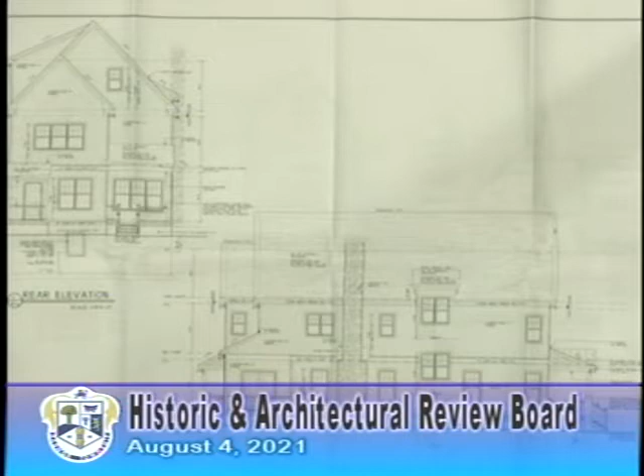Okay, are you going to put plantings or something to disguise that? Sure. Missing 3 feet? I don't have any objection. I'm glad that you did take our comment and put the chimney in. I think it makes a nicer looking house, and it'll be easier for you to sell. Thank you, we agree.

Any further comments from the board? Questions? Before I open it up to public comment? I suggest we open up for public comment. Is there any public comment?

Please come to the podium, sir. Can you hear me okay? Okay, members of the board, I have a printed form of my presentation. If I can, would it be okay if I shared that with you? Yes, okay.

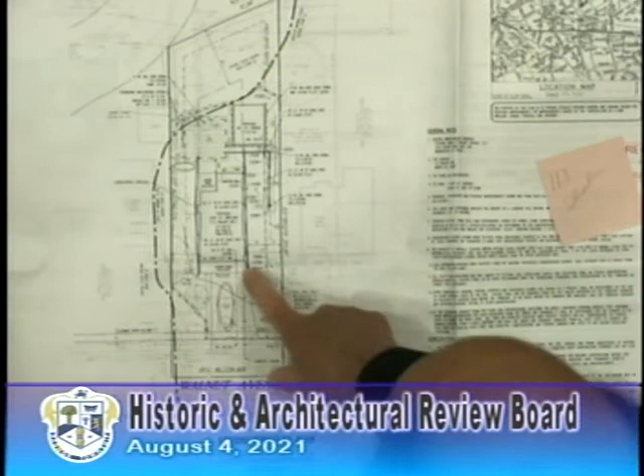But it's not. You're still sticking, it still looks like about 5 feet or so there. And I put it to you to look at this house, where the setback is 55 feet. But that's not, along with all the other houses on the block.

So I don't think you should cherry pick. You shouldn't cherry pick the twin house for its setback and ignore the setbacks of all the others. But you chose to cherry pick one in a block of Walnut versus all.

One person at a time, please, and then we could have further comment. Good evening, I'm going to ask if I can speak. My name's Gia Raffaelli.

I'm general counsel for Fox Lane Homes. I reviewed this project with them ahead of time. I tried to review your ordinance and your directions ahead of this meeting.

I just want to comment that I think we're getting off what I believe is the appropriate discussion here. I believe your ordinance asks you to provide input and direction in your certificate of appropriateness for a range of homes of varying setbacks, consistent with the North Wayne area. So you can't pick one house and say you have to be this far back. You're looking at a range of the area, and I think that's appropriate.

Just like you can't tell us that we had to be 10 feet from the street and then violate your own zoning ordinance, I don't think it's appropriate to say one house should be 55 feet back because a lot of the other ones are 55 feet back. I think that what we've demonstrated is that we do meet the general theme of your required ordinances and the design features that you're looking at. To get so specific to say we have to be 55 feet back, I think goes beyond what we should be talking about this evening.

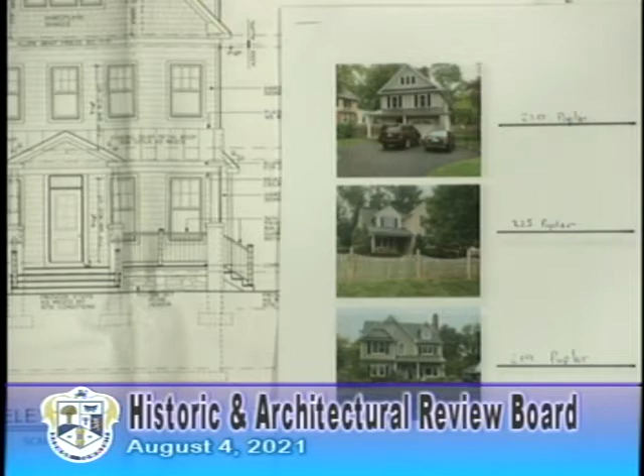I want to call attention to the fact that a contributing property is something that is contributing, and a non-contributing property is something that was built after a contributing property was demolished before this committee existed. Okay, so my question to you is, is that a historic house?

I can't see that far because there's too many things in front of me. No, it's a newer construction home. Okay, so you can't really use that as an example. Correct, so please don't use that as an example. I misunderstood the contributing versus non-contributing. I'm looking at North Wayne, and I'm finding examples of homes that are... You can't use an example of a non-contributing property to justify your non-contributing property. I understand that now.

Any further public comment?

Please approach, ma'am. I live on Walnut Avenue, and we did not know that the last... well, it doesn't matter, I'm going to shout anyway. This microphone? We did not know that this building was coming the last time, or we would have come to present then. When they talk about canvassing, we all live on Walnut Avenue, and no one came up and down Walnut Avenue

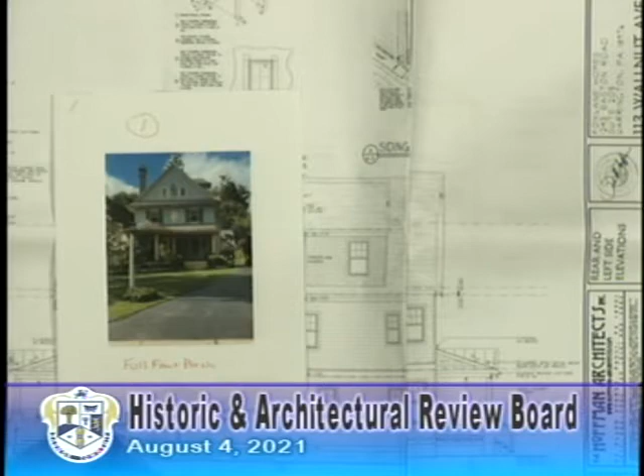Can I just throw out one idea quickly? So the inspiration for our design, which I should know the address but I don't, was this house. You might know the address? Is that the same non-contributing property that the gentleman submitted before? No, this has to be one of the original houses, I believe. I can't say for sure, I don't know.

From a size standpoint, if you look at that house compared to what we have, it does have a little bit of what I'd call an eyebrow going all the way across the front. Slide over, better. So what we could probably do to match this up, we could round the window, half round the window on the top, to mimic what's right here. And then we could take this roof, which I think the gentleman had the concern about being too flat, and bring it out to give it a little bit more depth, a little bit more contour, which I think would give the potential look you want.

Obviously, we have no problem doing a flat roof there, taking the little turn gable off. We were doing the turn gable because there's another house on Walnut, I think the opposite side of the street, that has a little turn gable with some gingerbread and stuff. That's where we were trying to match that look.

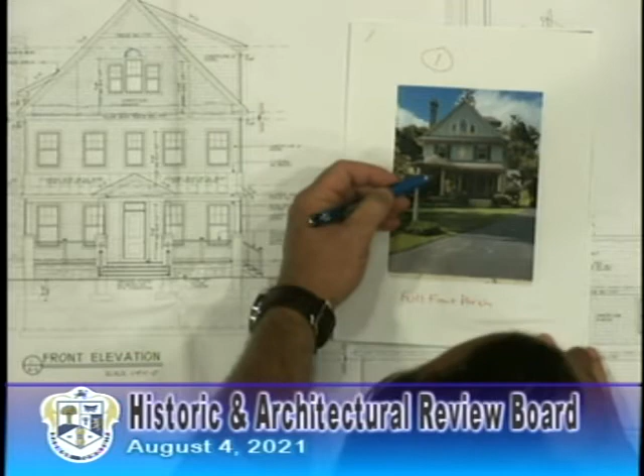Not a 5-bay design, right. But I don't think every house has to be exactly the same. Houses built 100 years ago were built the way they were because it was 100 years ago. Modern houses, people want more light. So just because it was built 100 years ago doesn't mean there isn't a better way to do it.

Well, there are hundreds of people living in North Wayne in old houses that wanted to have that. Which I was one of them. I currently live in one, I'm totally in agreement. At the same point, there's a lot of people that like light in their house. If you build a new house, you want it to work. But it's in a historic district. Completely agree. And once you're in the district, the whole point of being in that district is that you fit in.

Do you think someone who's going to buy in a historic district wants to have the only house that doesn't fit in? And that's right, I think it would totally fit in. The location is great, but you have this historic district, and that's exactly why it was formed. Other than the windows across the front, we could literally mimic this other house in the historic district and make it look almost identical.

Historic district, are you talking about the district? Because every time we talk about the district, you guys talk about contributing and non-contributing properties. We're talking about the district, which is North Wayne, and there are homes from varying time periods. What I'm actually talking about is Walnut Avenue and the relationship of this house to the other houses on Walnut Avenue. Everyone realizes the district as a whole has houses from varying time periods, from say 1870 to 1910. But we're talking about the spatial coherence of Walnut Avenue and the Wendell and Smith homes around it.

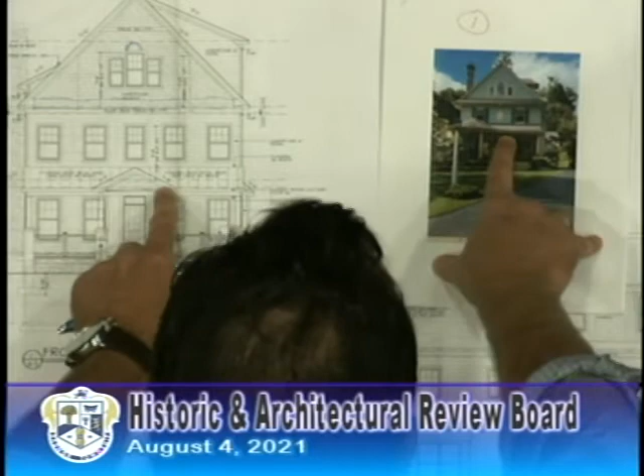We'll get the exact address for you. But we would match that. We would obviously do shingle on the metal roof. We'd take the little turn gable out to pretty much match it, and then add the half round window up top, if that would help it fit in more with the historical feel of the neighborhood.

Can I comment? Just mention that the fact that the chimney is cantilevered - the chimney came all the way down and the door has no setback, that's why it has to be cantilevered out over the chimney. That came up two months ago. We proposed actually putting the chimney in the middle of the house, similar to what it is on the twin, to get that look. I believe one of the board members did not like that look, so that's why we did it this route. But it came up two months ago.

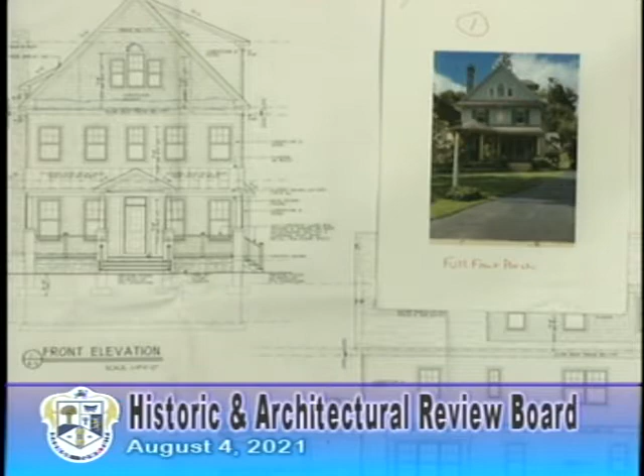Regarding the chimney thing, and we live next door, I've been up front with them. I'm the person that invited him over to my porch to discuss our concerns about the property. He had said that HARB had suggested they put it on the ground, but there's a lot of precedent for it being on the roof. Ours is, I counted at least 6 on our street. They're not all on the 100 block.

To build a fake chimney in the middle of the house and a cantilevered chimney that went part way up that would be functional, right? Yeah, right, correct. So just to clarify, that middle of the house chimney was the non-functional cosmetic one? It would just be for looks. Yes.

Comment, please? I'm John Velutini, 106 Walnut Avenue, and I understand Michael's concern about the flat facade.

So I don't know what's going to come out of that between you and HARB and all that, but when I look at the flat facade, if I look at the house, if I look at a bucket of new construction, relative to new construction, it looks like a nice house. But relative to the neighborhood, the flat facade, and what's the depth of the porch, do you know off the top of your head?

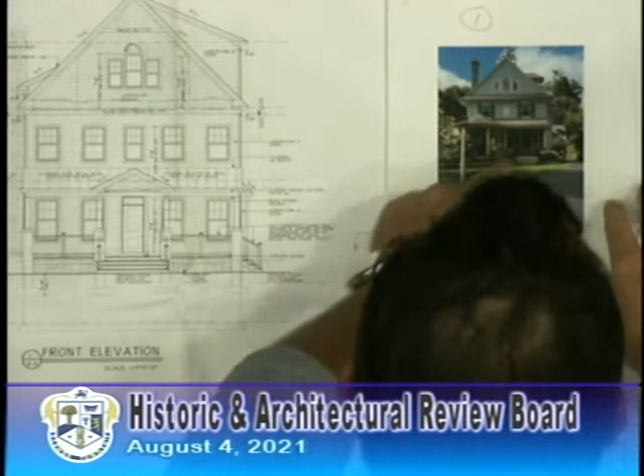Yeah, no, we could definitely do a color rendering. Having said that, this is a color rendering, and we'll mirror the windows, we'll mirror the roof line here, and then we'll just do a flat roof straight across here, and we'll get rid of the turn gable. So we'll pretty much give you exactly, other than the little bit of the half round here. If you could do—I can't see the picture that much, but is the front door centered or on the left? This one, on the right. Oh, yeah.

I'd like to make one comment on a 3D presentation. Of all the time I've been on the board, over 5 years, we only had one presentation that was in 3D, but boy, did that say a lot. It was wonderful to be able to see those proportions in multi-dimensional space. I believe it was Gardner Fox who did that, the architect, and it really made a difference in the presentation. So maybe that's something you would like to consider, because the visuals really explain a lot. And it seems like the questions from the neighbors, they want those dimensions, and I think it would really help if you could do that. Would you be willing to do that?

Yes, we'd be willing to do a rendering so you can see it. But just to confirm, if we do the things we talked about to more mirror the house on Poplar, we just don't want to come back next month and then the neighbors have something else to bring up—we just need guidance, like, that works, and we'd be okay with that, based on obviously seeing the 3D rendering. But we just don't want to go another month and then something else comes up, hey, what about this? So we just want to kind of—

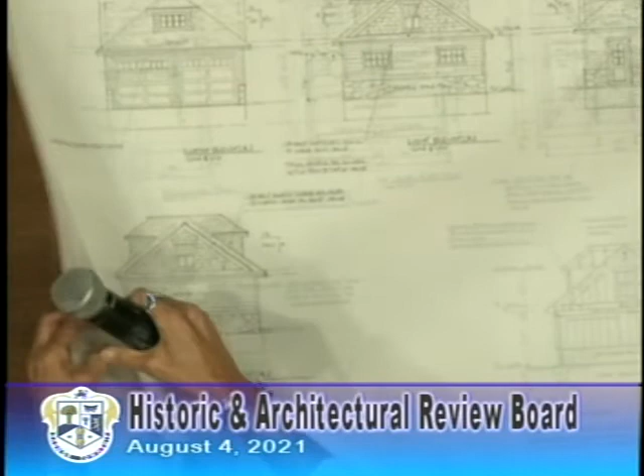How do you do that? How do we get the overhead to work? Oh, there it is. Not very clear.

Okay, so part of this garage is existing. It's got a stone foundation, and we're not exceeding that. The current structure is absolutely breaking down—it's not safe to even park a car in there. It has a very low pitch hip roof, which obviously was not built with the original house; it was added on later.

So we are duplicating the garage somewhat, but I'm also trying to add in some elements of design from the house. The house has hipped roofs—the whole house is all hip roofs, hip dormers, hipped everything.

The problem was these people need storage. Their existing basement is all stone and very damp, so they can't store certain things down there, and they have limited storage in the attic because of the extreme angle.

So I designed a roof that combines elements of the existing garage and elements of the house—I've got dormers on each side. The facade facing the street has the two garage doors, carriage house doors, which the existing garage has. I kept a hipped roof design pretty much matching the house, with a hipped dormer for more space inside, and I have dormers on both the front and the rear.

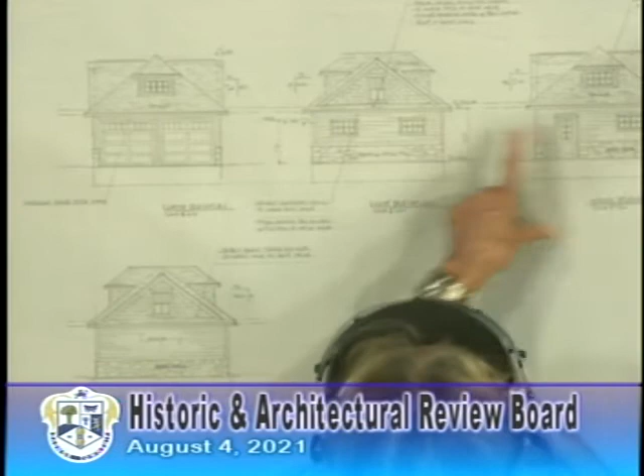The windows we're duplicating the windows that are there now—this window in the front, and the side windows duplicate the house. Those are the windows on the house currently. They will be simulated divided light to match the house.

The trim will match the house. The siding will be a combination of clapboard with a few shingle siding up top. The roofing will match the shingles on the existing house. The stone we will just repoint and repair as necessary.

I have a question—what is the height of the existing garage? The height of the existing garage is a little over 8.5 feet, and we're proposing 9 feet so we can get an 8-foot door in there. Okay, thank you.

This is one of those Japanese-style houses? Yes. Were you planning to put that little flourish on the roof that the rest of the house has? We could, if you'd like, if it's not going to be economically onerous. I think it would make it look like it truly belongs to that house—that's such a striking architectural feature, more so than the coloring or siding materials.

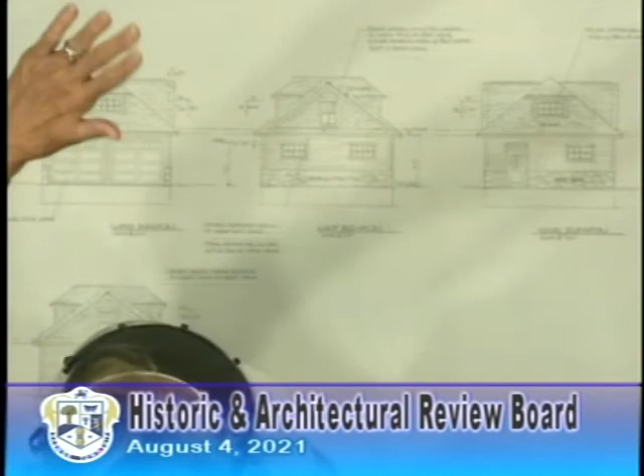Okay, so I think what I can do is a little scoop right up here at this peak. That would be perfect. So only the actual dormer—this one would have a scoop to it. We could do that. It just means cutting the angle in the rafters.

It's also good to see that the original foundation will be used. Yes, it will still be there. That's one of the things we strive to do—preserving materials and original footprints. Bob, could I speak to that, please?

Surely. A few questions. On your last page on ASP, it appears that the existing garage is over the property line. Is that the case?

No, I mean, just visually when looking at the drawing from Gardner Fox. Bring the other...

We brought our builder, he could speak to it. I'm Jane, I'm the property owner of 111. Can you hear me? Okay great. If you look, you can see the pins. The actual structure is within the pins, very close to the property line, and the overhang is on an easement in perpetuity. I brought a copy of the easement with me.

The reason I bring this up, and I believe I spoke with your builder about this, your plans say to verify the foundation, which is very common for structures of this type. It'll have a rubble foundation. The point I'd like to make is that if the foundation is deemed unsuitable to build on, which happens occasionally, we have to be very careful that you pin that foundation exactly where it is so it can be put back with a new foundation, because it is an existing nonconformity. So there's just a technical aspect to that, just wanted to make sure everyone's aware.

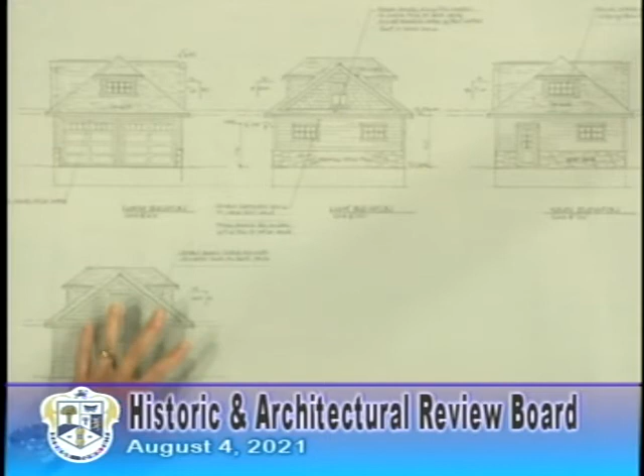Also, there is some vegetation around here, so this window will be facing you, that will be facing yours. So when you look at the garage, when the vegetation is finished, you're going to be seeing still a window up top. You won't see side windows, but it's more money to add windows. I was just duplicating the window configurations that are there now.

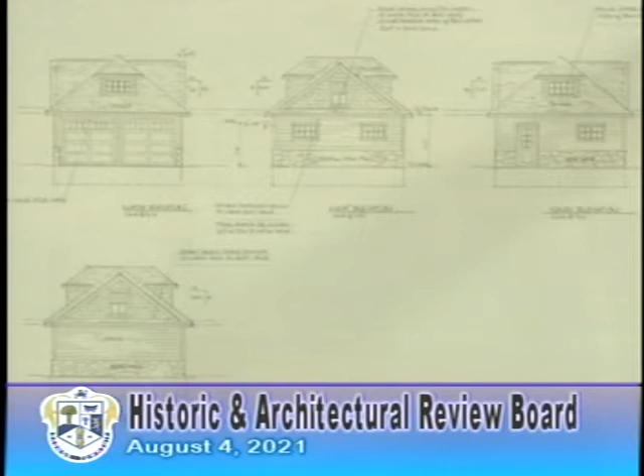I think your design's fine. Any further comments or questions from the board?

I have a motion. I'd like to make a motion that we offer a provisional certificate, that we recommend a provisional certificate of approval of appropriateness with the change to the roof line to mimic what is existing on this very striking and also very public Japanese house, because it's on a corner and every inch of this property can be seen from the street. So as we did with the addition that they put on, we really just need to be careful that it looks like it came with it, even if it didn't. Got it. Understood. So I make a motion for a provisional certificate of appropriateness with this change in design.

Okay, can we just submit the drawings to you for the change of design? It's minor, do I have to resubmit at another meeting? No, okay. So that's the language that's going to go to the commissioners. Got it, so they will look for that change in design. Okay.

Is there a second? We like the design as it is. Yeah.

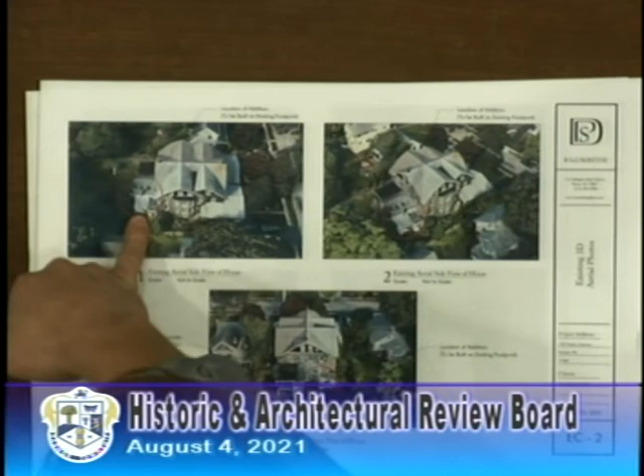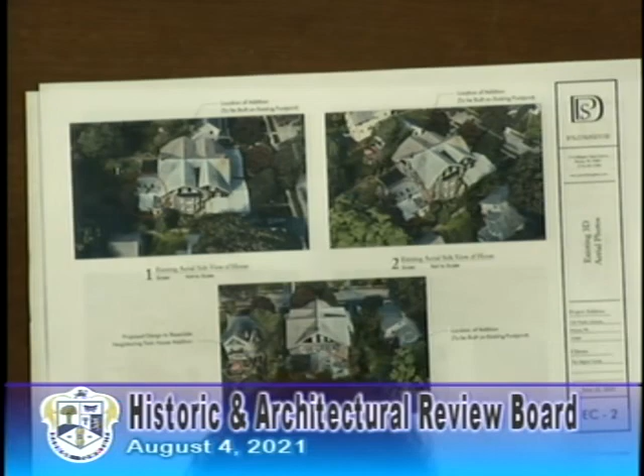And just to give you an aerial view so we can all see where we are. In this first image, Poplar runs down the right-hand side of the picture. We're in the very rear of the home here where the red circle and arrow are. Can you see that? It's a little dark up there. Similarly, from this angle, Poplar is up to the top right of the page, and a direct aerial rear view of the home shows Poplar at the top of this picture. So we're in the back here of the home, just to give everyone the site location.

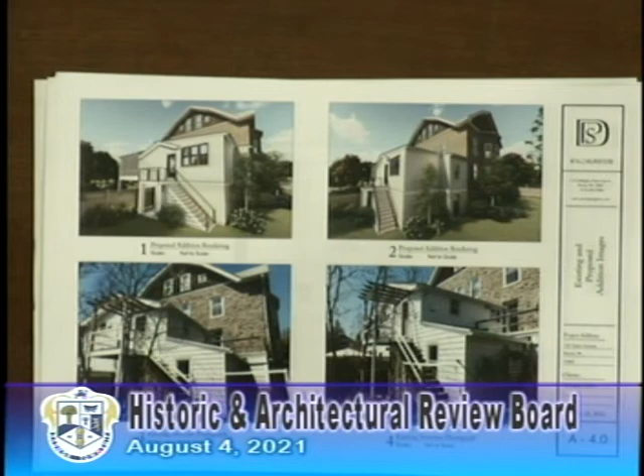So what we are proposing for the homeowners is working on the existing footprint to remove this patio or deck and extend the kitchen out, keep the existing stairwell, and really just capture this additional square footage to provide a larger modern kitchen for the family that lives in this home, but honor the footprint and keep the design from the exterior relatively simple. Let me pause for any questions or comments while I'm on these images. I can move into drawings, but based on your feedback tonight, I thought I would start with this.

Yeah, I was curious, when I saw the pictures of what exists there in the back, and this has come up before, I was always curious because sometimes those additions were used as places for toilets. There were a couple of examples in North Wayne, I believe, and I was always curious about that.

So I got a pattern book from 1861, Woodward's, a popular pattern book at the time. It was really interesting because in a lot of the patterns in that book, the toilets were on the first floor in the back of the house, and the bathrooms, where you had your bathtub and things like that, were on other floors. I know there was at least one example in North Wayne where that portion in the back of the house was at one time used as a toilet. That is interesting.

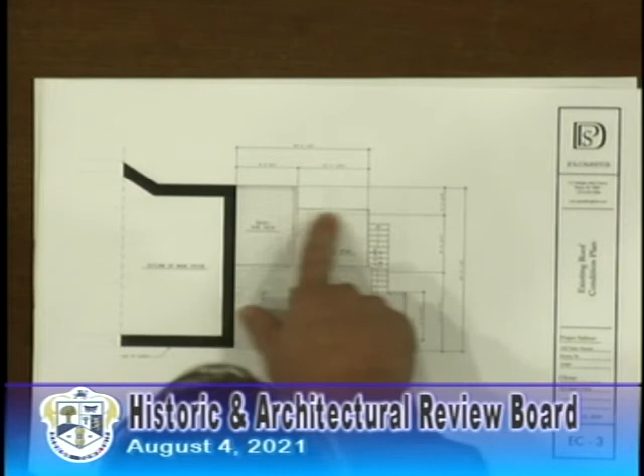Okay, now that we can see what this will look like, I'll take you through the plans. This is the existing roof plan of the home. Here's the existing kitchen roof, the existing side deck, and the existing basement roof. And here's the existing back deck and stairs. We'll be using this existing footprint to really just bring all of that into the interior.

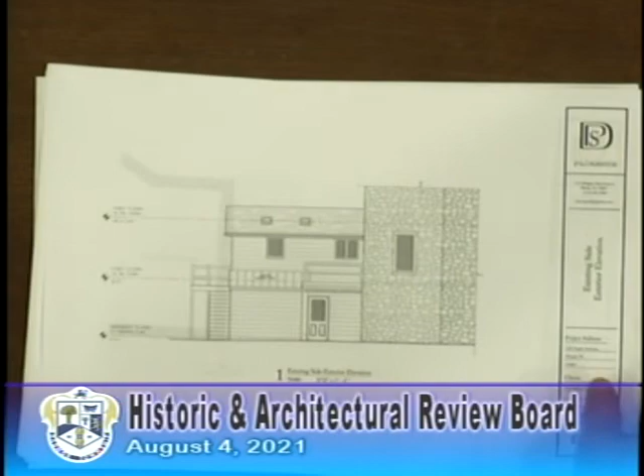And here is the proposed rear exterior elevation, doing our best to mimic the roof line on the other side of the twin, so that if anyone were to look at these two homes together, though they are twins, this will make them look more like twins than they do today.

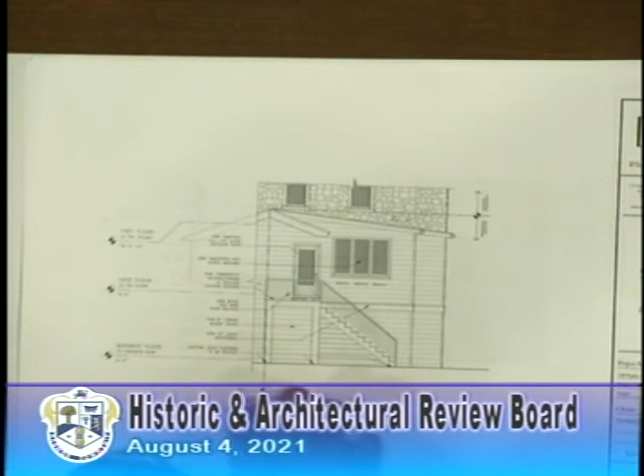I don't know if you want me to take you through all of the materials. Happy to do that. Here's the proposed side exterior elevations. Again, same stairs, same back deck on the existing footing. As you can see in the renderings, we will have plantings here to compensate for some of the siding, but everything else is matching the existing styles. The K-style gutter will match the decking treads, all of the windows, the siding—everything is really designed to be relatively discreet.

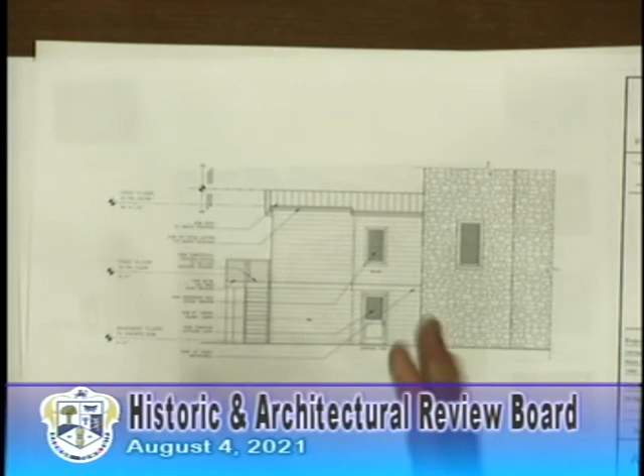The exciting piece of the project for the clients is on the inside of this home, so our mission was just to contain the space and match what we could to the existing. The proposed addition, in my opinion, does keep the main house prominent. Yes, that's what we look for. Also, I think it would be really a challenge for somebody to see this addition from the street. I agree.

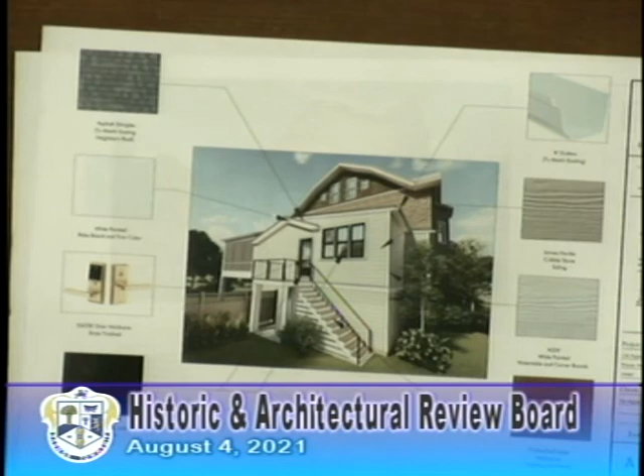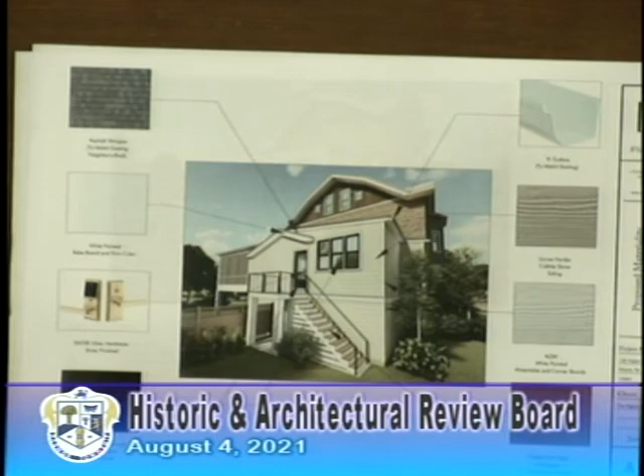So just to move back to the 3D rendering and show you, the materials are called out here. I won't read them all to you unless you'd like me to, but everything has been accounted for, to the point the board is making: the objective here is to not have any impact to the street view of this home. The front of this home is unbelievably cool, and we're not doing anything to it. This was actually the cover page, but I wanted to start with the street view just to emphasize that we're not impacting it at all. So that concludes my presentation.

Well done. Any further comments, questions from the board?

Okay, well, we have a motion. I so move that we offer a recommendation for a certificate of appropriateness with the understanding that this cannot be seen from the street. Thank you. Is there a second? Terry? Yes. Okay, we have a motion for certificate of appropriateness. The motion was seconded, and it was thirded. I also say yay. The board recommends a certificate of appropriateness. Thank you for presenting to us today. Thank you for your time. Thanks.

All right. Our last piece of new business this evening is HARB 2021-17, 424 Woodland Avenue.

Before we get into the presentation, I'd like to give some basic background on this property. According to Radnor Township records, they say it is a contributing property. It was built in 1885 to 1889. The architect was Price Brothers. The builder was Wendell and Smith.

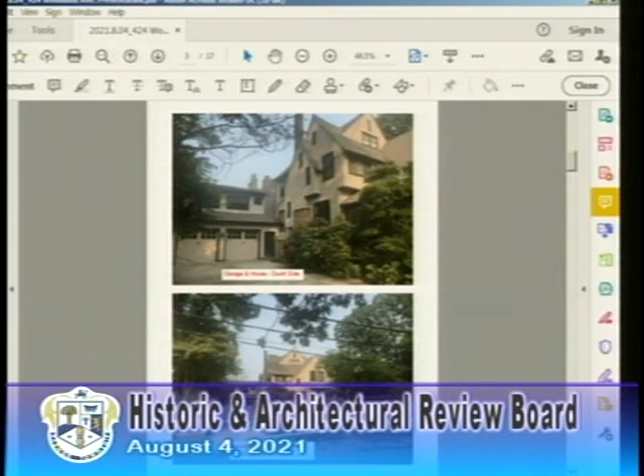You can see this is the house from the street. We are not touching anything on the rest of the house other than to restore it, and even the windows are in good shape. So we're painting, we're keeping the roof line, we're keeping all the stonework, and basically the additions will be done in the same manner, all the same materials, and we're going to match cedar siding. It's painted cedar siding and cedar shake siding and so forth.

This is the view you see from the street. That piece, as you can see, is the addition that was done in the 90s. The kitchen was enlarged, and a very large family room was built on the back, and the garage was actually built in the 90s. And you can see the deck that sticks out from the French doors.

So what we're just, there's the side of the garage, it's along the property line, there's a very long, mature tree line along that side. And just for context, you probably know about this neighborhood, they were all built sort of slightly quirky versions of that era of house. All of them had additions done to them. A lot of them are very well improved, but it's a great little neighborhood.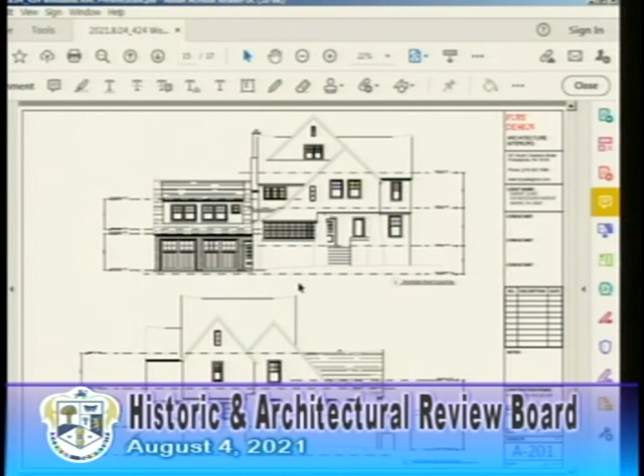Not touching the front. We're not doing the garage doors over. All of that's going to stay intact. And there's the elevation of what we're intending.

If you have questions, please go ahead.

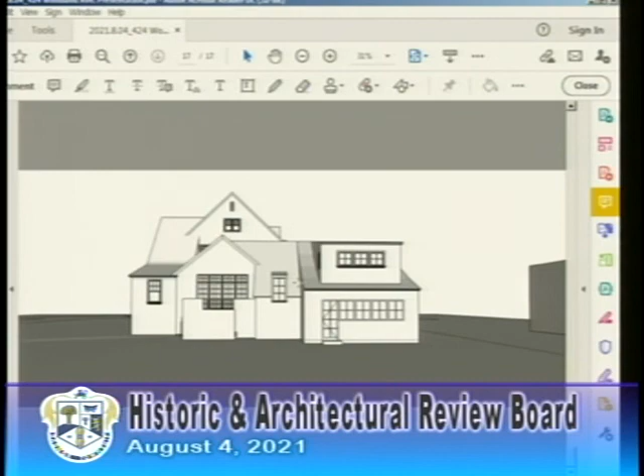You've given me so much paperwork, I'm not exactly sure where you are, it's a little confusing. This is a different design. Here we go, right here, the last page, there it is. Oh okay, thank you, I'm sorry.

So we are actually enhancing that, creating that sense of curve in the roof. That's very helpful. In fact, if you look at the additions done in the 1990s, none of them had the curves. We weren't in existence in the 1990s, that's why we're trying to bring it back to fit into the house.

Any further comments or questions from the board? To see the way the front elevation's changing, I'm looking at the right drawing here, to see the original width versus the new width, right?

That's all existing, and we're not touching it. Doesn't this show the addition then? Why don't you go back to that drawing where it says proposed? Oh, I'm sorry, these are just the height. Right, correct. So the front facade is exactly as it's going to stay, and we're not touching it.

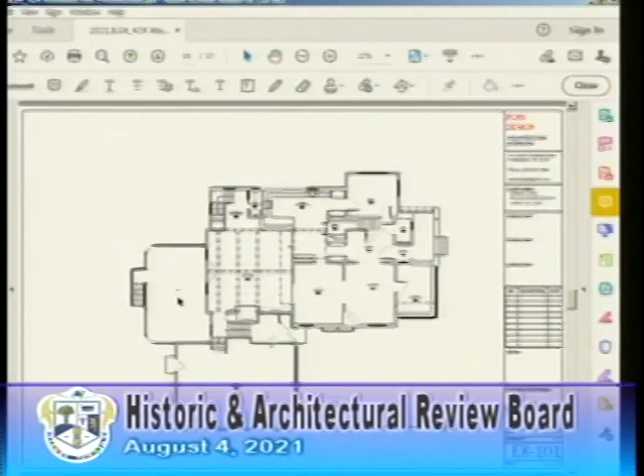The 3D rendering you've given us is different than the plot plan you've given us. It shows some kind of, I'm sorry, I'm just looking at it. If you look at the plot plan, the pink part shows the extension of the garage. But there's something that shows this curved element, is that just a ground level thing?

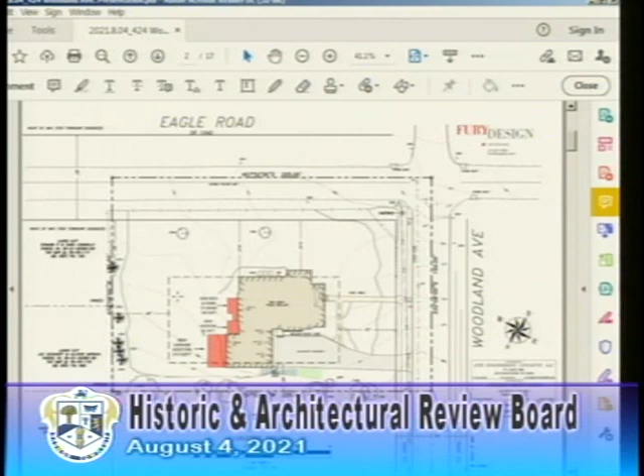It's a ground level thing, and we're not even sure, potentially there may be a patio in the garden or some sort of a slate space, but it's not architecture. It's very large.

Any further comments or questions from the board? Do we have a motion?

Certificate of appropriateness, okay. Is there a second? We have a motion for a certificate of appropriateness. The motion was seconded. It was thirded. I also say yay. Thank you. Congratulations, and thank you for presenting to us today. We appreciate it, and for your patience, this was a long meeting. Yes, it was interesting.